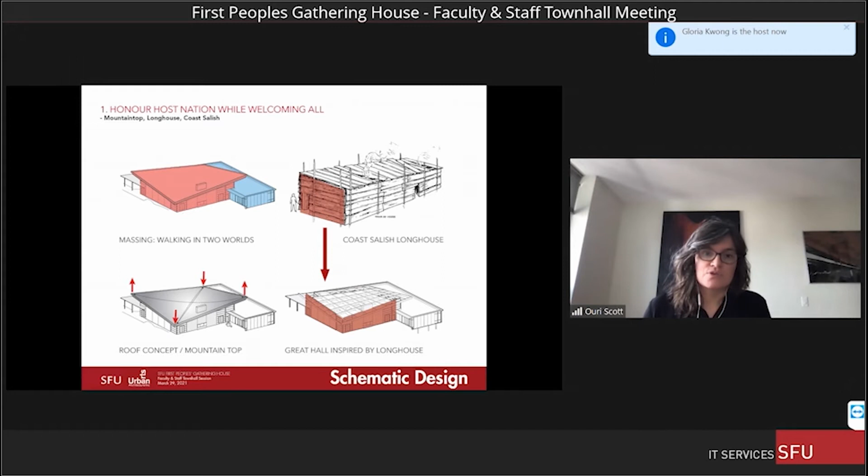Thanks, Ouri. Promoting wayfinding was another key guiding principle, and we wanted to do that from both the campus level as well as in the building itself. In terms of the campus connection, being highly visible with a prominent entry from the ceremonial walkway, as well as acknowledging that future campus development may emphasize the north-south connection and making that route prominent as well. Then from within the building, having clear axial geometries with a hierarchy of circulation, so one can connect to the outside with views to the north, south, east, and west, to orient oneself within the building and have a clear hierarchy of circulating around the space.

We're looking at celebrating culture and having the materials be a way to do that, to tie to tradition and history, as well as acknowledge the form and aesthetics developed as part of the Erickson Massey plan. Looking at walking in two worlds, having material tell stories from different perspectives is also a consideration. So bringing cedar into the Great Hall and having that tradition. They're looking at the opportunity to use board-formed concrete as a way to reference the use of concrete on campus, as well as bring in natural wood elements, considering exposed aggregate flooring to root and connect to the ground and reference shorelines and that sort of geometry, bringing the sense of place into those ceremonial spaces where concrete may be used.

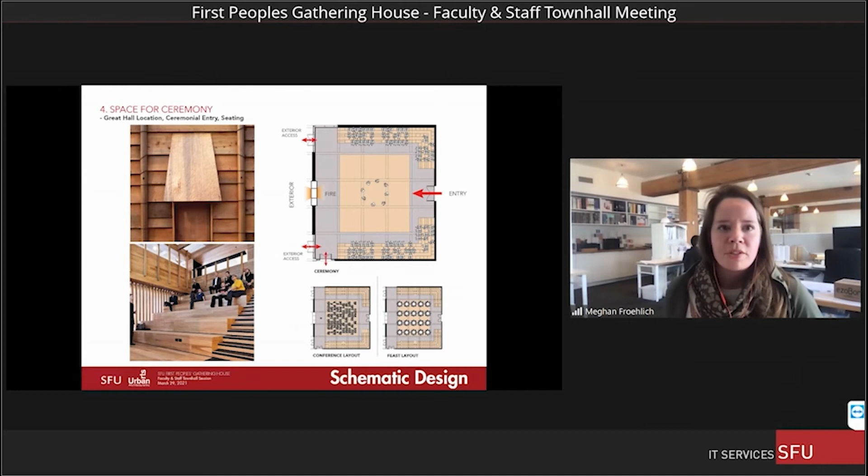Here's a view of the inside of the ceremony space, looking at opportunities to have panels that honor our host nations on either side of the double-sided fireplace, and the connection to the exterior looking west. Then the roof, that dynamic form Ouri was describing earlier, as well as the opportunity to weave in and bring those cultural references.

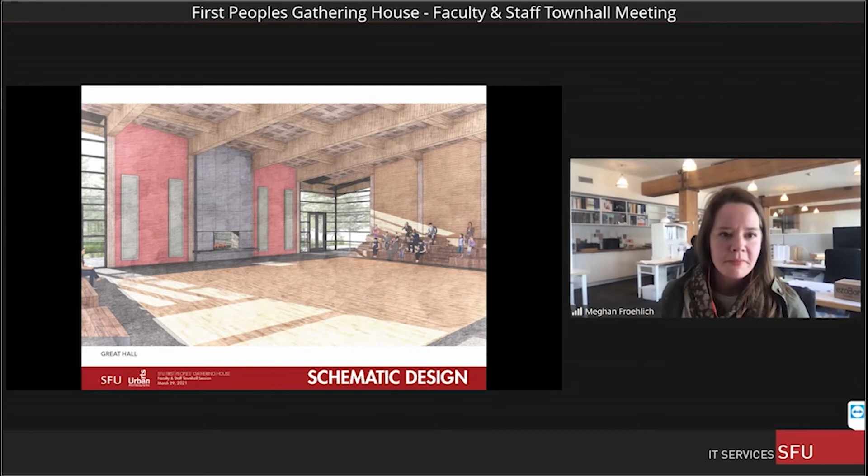Looking at this notion of providing connection to land, thinking about how the longhouses were situated beforehand, but also the mountaintop location. Obviously the roof is a very important driving factor in terms of how we're positioning the programming within the building. On the front side, to the ceremonial axis, there's a connection to the north, and then to the carving court — the maker space is off to the right-hand side, which complements the outdoor patio. And then we have a connection to the south with the seminar room, but also connecting to the orchard to the immediate west. Next slide.

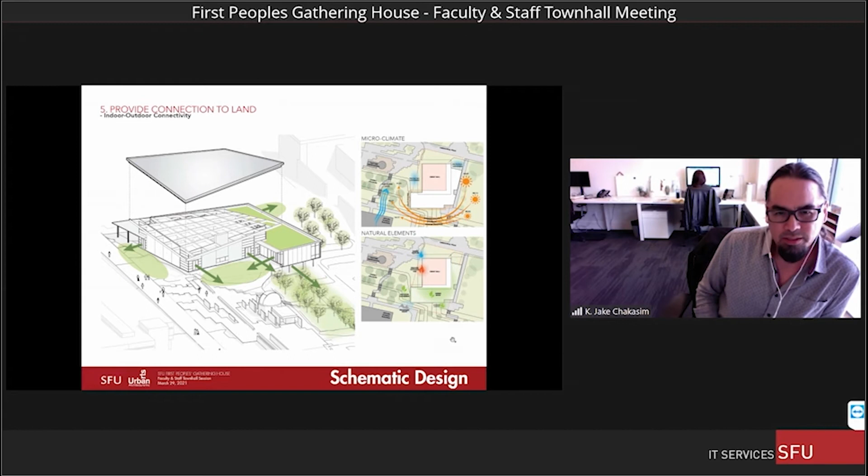Again, what Meghan was talking about, the notion of water and circulation, so trying to utilize the roof to its benefit and maximizing the drainage surface runoff that would actually tie into the apple orchard or the cherry orchard to the bottom, and also the passivity of the wind going from the north to the south, and maximizing the form of the building to our benefit.

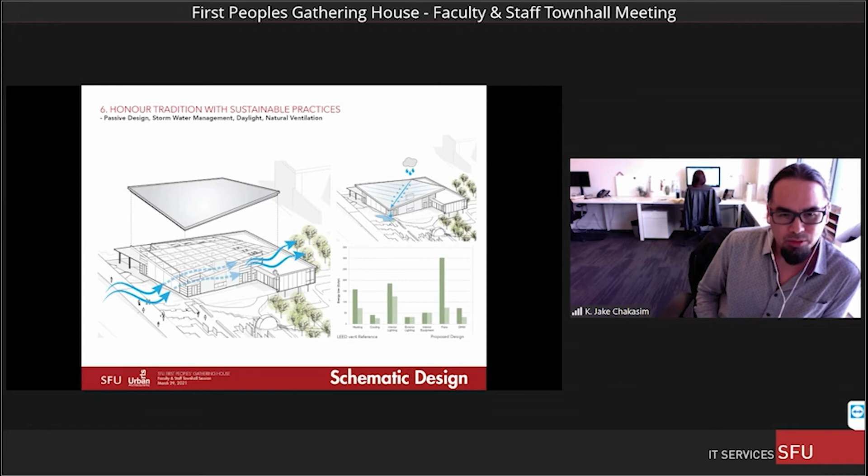Next slide. And then when you look down in plan in terms of some of the material qualities we're talking about, you see the entry plaza to the northeast, the front porch to the ceremonial walkway, the ceremonial gathering and the learning carving court off to the west, and then the outdoor gathering space off to the left-hand side to the cherry orchard.

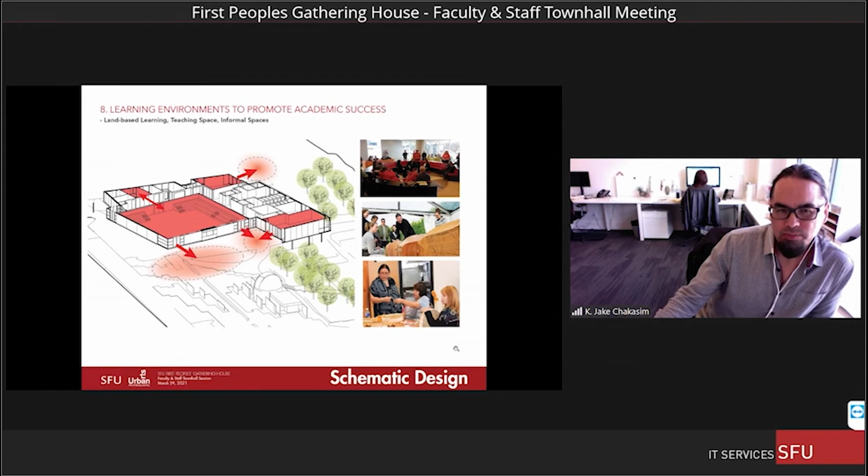And here is another perspective up from the south, looking from the cherry orchard to the home away from home, the multi-generational lounge, which is a more informal gathering spot for students just to lounge, congregate in the kitchen, and then obviously have outdoor semi-private space at the lower level of the Great Hall.

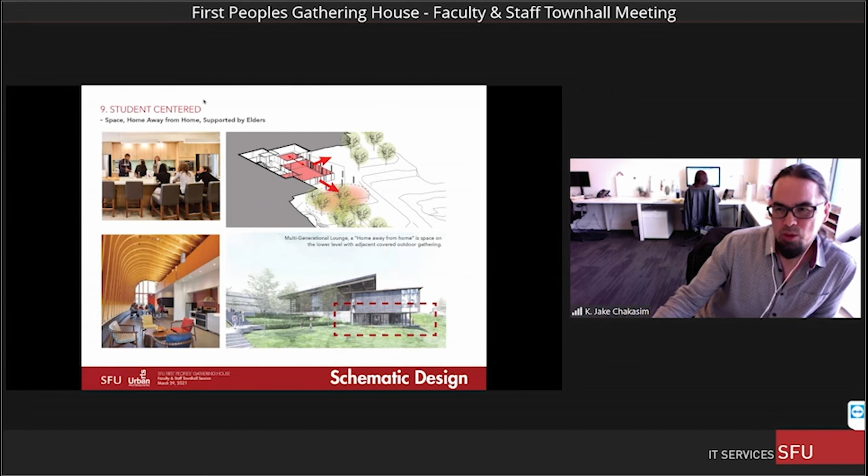Next slide. Go ahead, Meghan. I'll just walk you through sort of the overall floor plan. So as Ouri mentioned, entry from the ceremonial walkway with the atrium space leading directly to the Great Hall.

And on the east side of the building, there's connection to services to be the most efficient location for that, supported by the elders room directly across from the east entrance, and then two office spaces for the programming and visiting scholar offices. Then there's the secondary exit, seminar room as the sort of anchor to the end of the atrium space, with access to the exterior and views to both the south and the east.

And then that secondary corridor with access to the exterior on both sides. What we're calling the lower bar provides service space, so the servery, prep kitchen, janitors, and garbage area. And then if you guys have seen the plan, you'll notice a modification here.

We've made a sort of flow-through bathroom area so that people can enter from either side to make it a really safe space, gender-inclusive washroom, and then the chair storage and dressing room as well.

And at the end of this, another sort of destination at the end of this end is it's anchored by the multi-purpose makerspace, as Jake mentioned, connecting to the outdoor carving court.

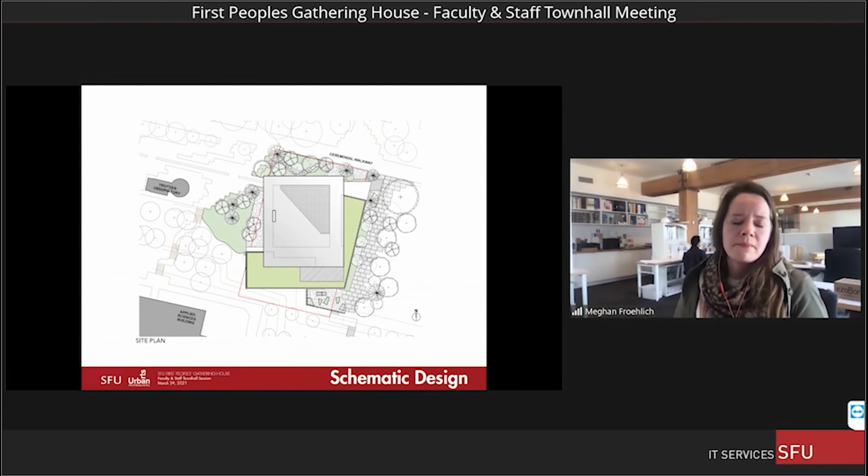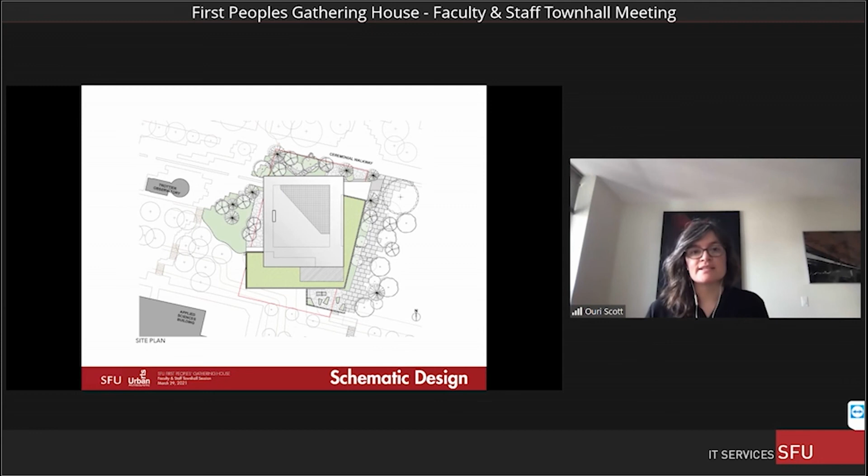Just to highlight some of the landscape elements as part of the site, at the entry that we're calling the entry plaza, there's a covered outdoor area. To the north of the entry is a space that highlights our design response of being in two worlds - from the ceremonial walkway, providing a natural landscaped area you can meander through, but also responding to the Massey Erickson master plan, which talks about bringing nature right up to the buildings.

As Meghan and Jake highlighted, there's a carving court outside the maker classroom in the Great Hall on the upper floor. To the south, we're looking at a service area, as well as potentially an outdoor gathering place, a place for gardens, for teaching, and potentially an outdoor kitchen. On the lower floor, which you can't see here since we're looking at the roof, there's a connection from the multi-generational, multi-use lounge to the south and east that connects to the lower cherry orchard on the site.

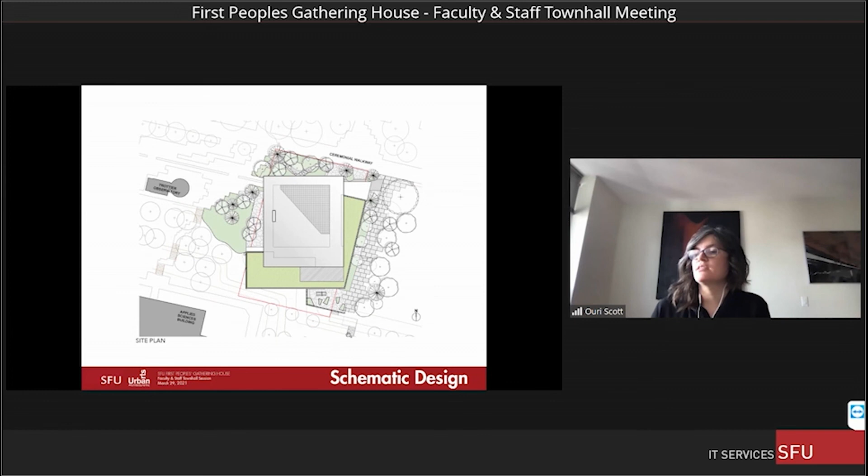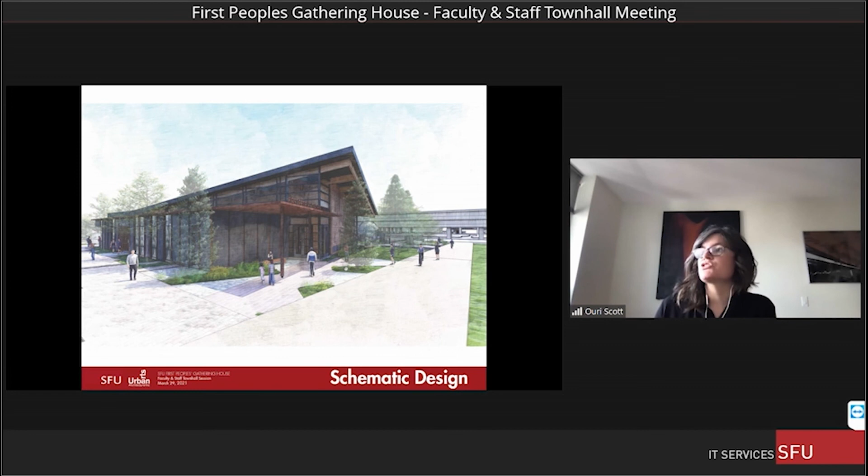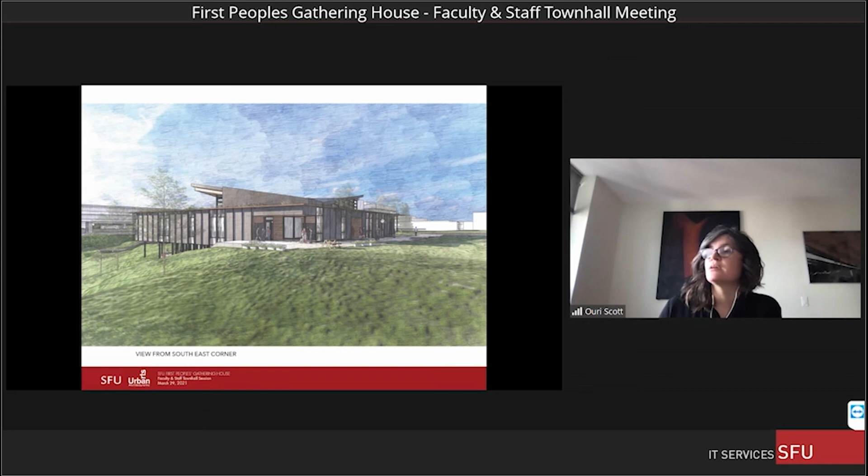You can see here what we're calling the lower bar has vertical articulation on the facade, and this is something we're exploring now as we move further into design development - what the elevations of these lower bars will end up looking like and what the material will be. You can see the green roof popping out over the roof of the lower bar, and then the expressive form of the Great Hall ceiling or roof structure.

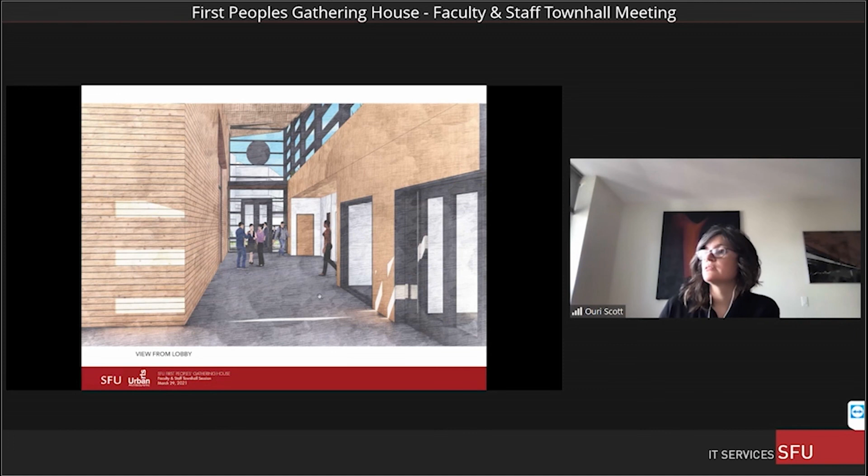So to give you an understanding of where we are in the process, we're presenting today our schematic design, and we're starting to work towards design development. After that, we'll do construction drawings that will be used to build the project. Construction is intended to start the winter of next year, and the opening of the building is intended to be in fall of 2023. So we're still early on in the project, and it's been an honor for our team to be working on this project, to be able to present to you an update today.

Before we get into a discussion, I'm just going to share with you some places where you can get further information. The ARC report is available on the SFU website, the SFU reconciliation website, and you can get further information there, and those monthly updates are being published on the SFU First Peoples Gathering House project information site.